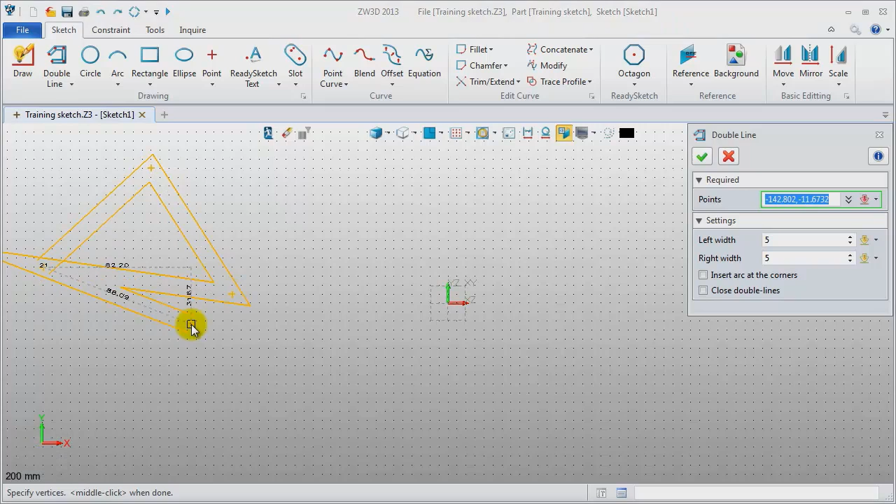Pick these points, and pick these settings options to create a closed geometry with arc. Change these values to finish. Okay, here it is. Let's try rectangle.

Pick 2 points, move your mouse. Done. Very easy.

Slot geometry. Define 2 center points and radius. Done. For point curve, just need to pick some points in any position.

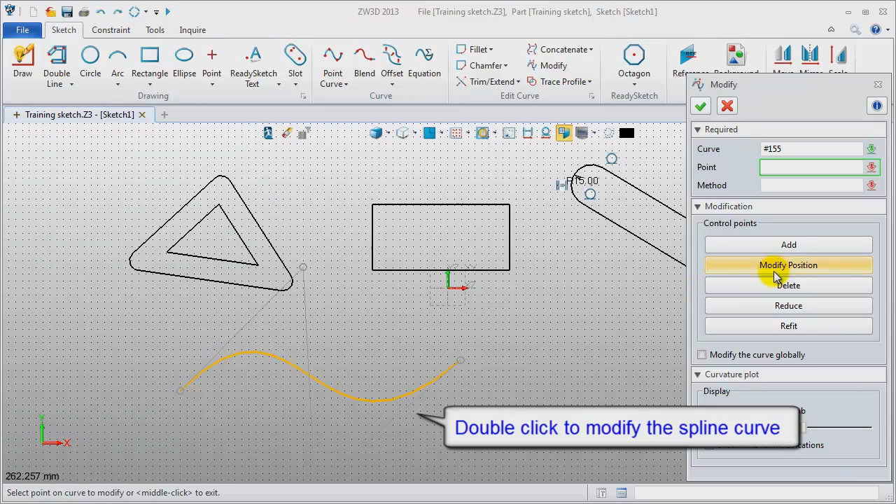Double click to modify it. For example, modify position. Select the control point to change it. Change the other one. During this process, pick this option to display curvature comb. Then curve information will be more intuitive.

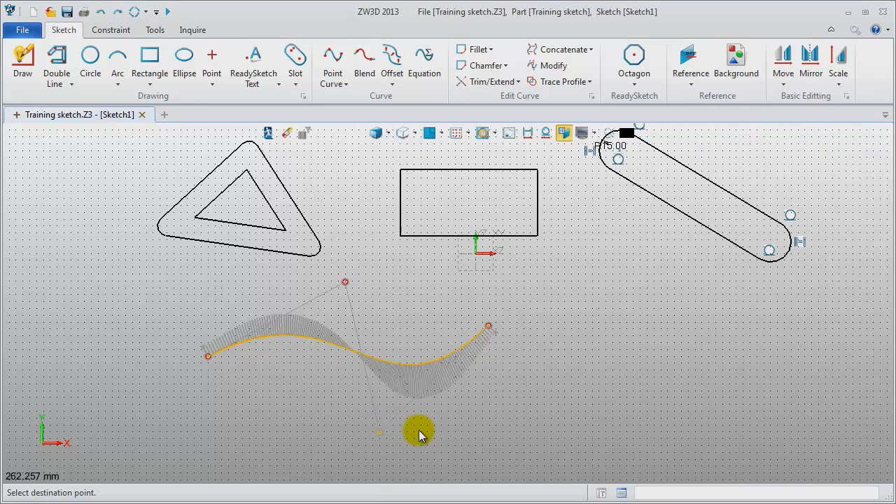Create an offset curve in both directions. Also, there is equation curve, providing several different types.

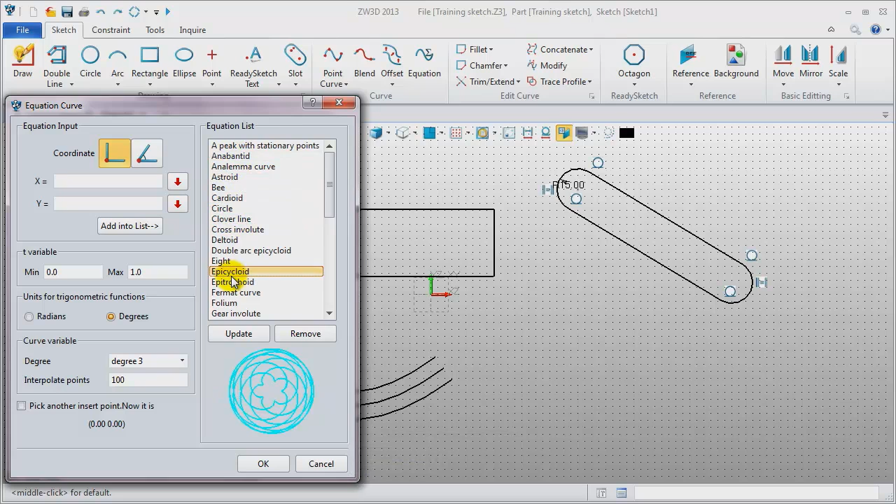Double-click to select it, and then define a new location. This is the helical curve. All of these operations are easy to learn.

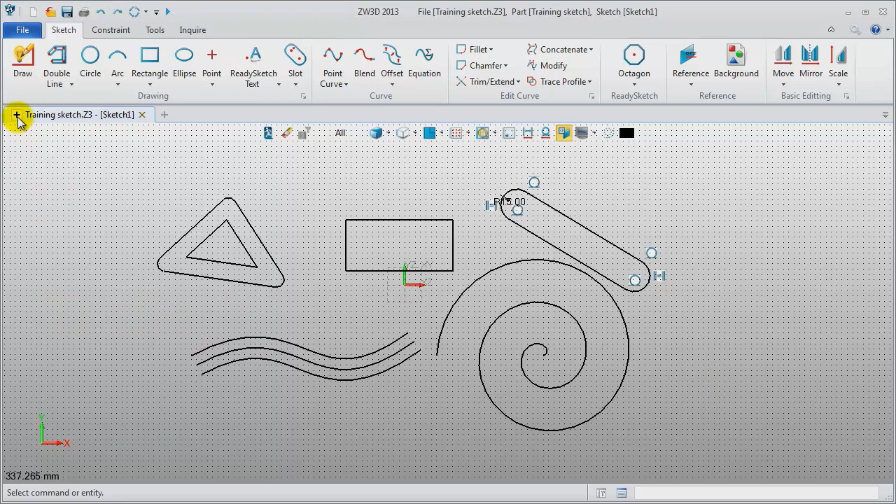The following section will introduce quick draw. Firstly, create a new file. Name it Quick Draw.

Okay, click Draw. Directly select points to draw lines. Here, you draw a triangle. There are other options for you.

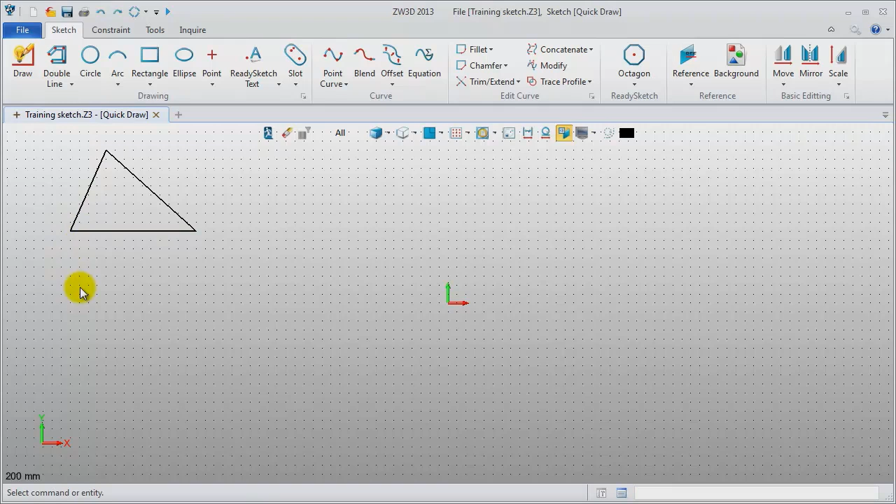The second type is tangent arcs. You draw a line first, left click to change the control condition, and then draw tangent arcs.

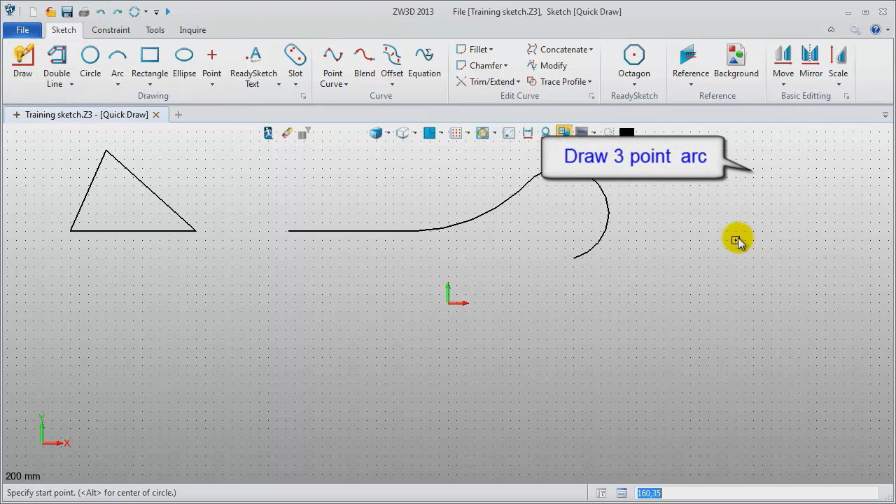The third type is 3-point arc. Pick the first point, press Alt button on your keyboard to define the second. Directly pick the third. The fourth type is circle.

Press Alt to define the center point and then select a boundary point.

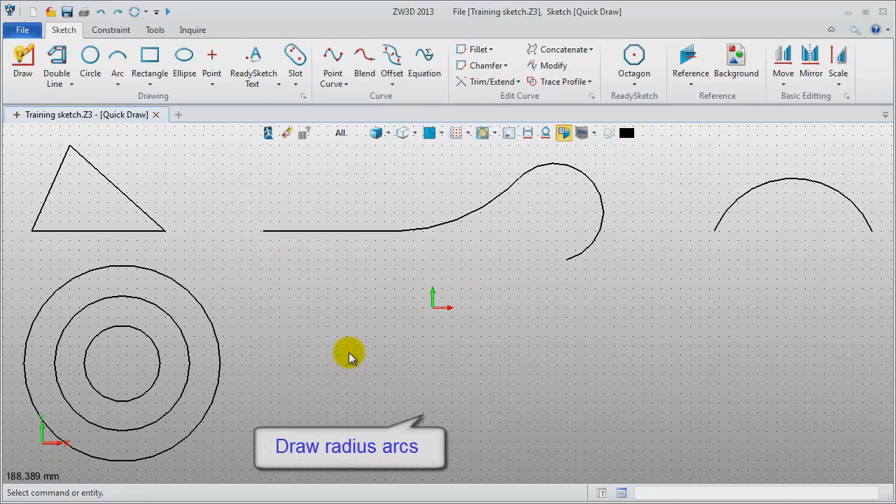The fifth type is radius arc. Pick the first point, press Alt for second point, and then input the radius. Then move your mouse to find the shape you want.

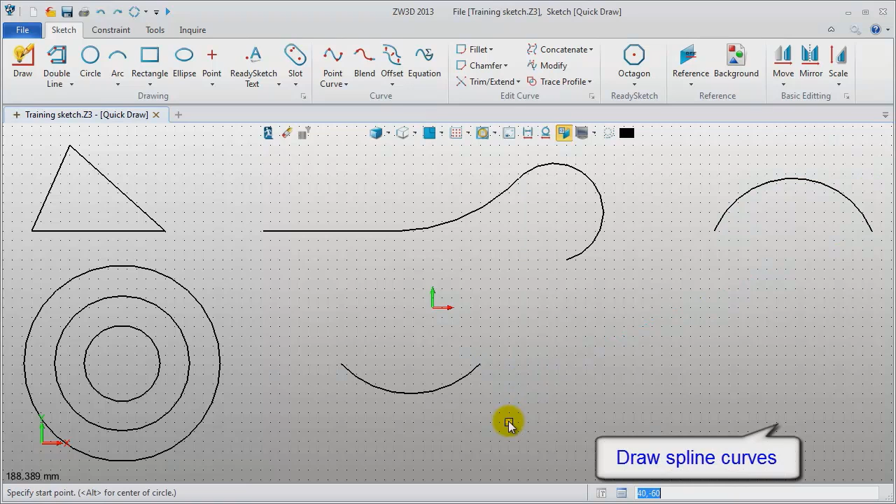The sixth type is spline curve. Select the first point and press Alt for second and third point, then directly pick other points. Also, you can double-click to edit it.

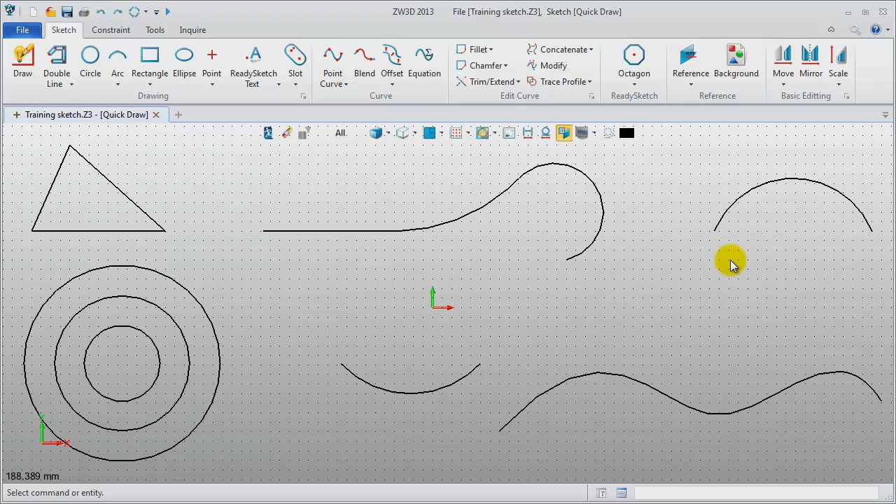Next, we will introduce the trace profile. Again, create a new file, name it trace profile. Insert sketch, choose XY plane.

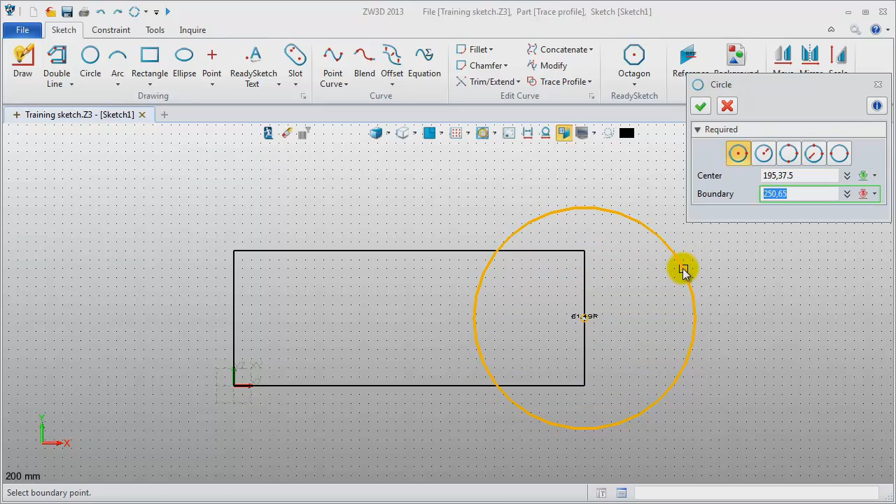Now draw a rectangle by 2 points. Add circle geometry. And then do it again on the other side.

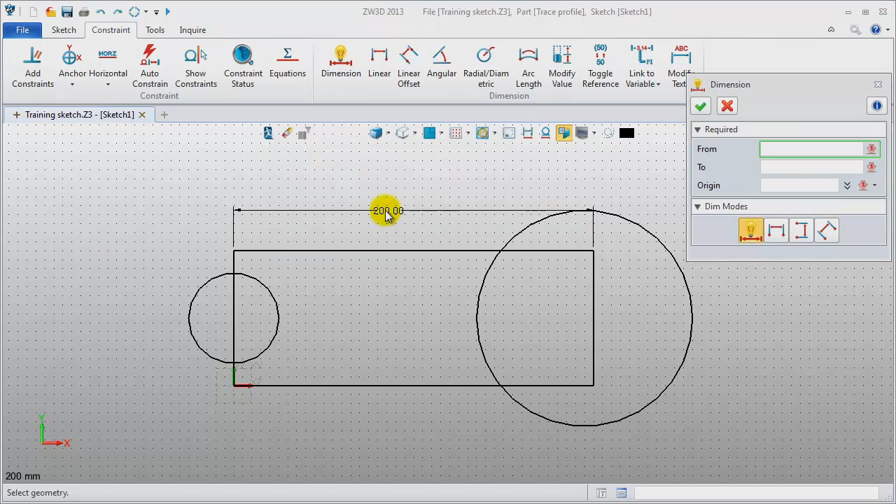Now add dimensions. The length is 200. The radius for the right circle is 60. Then add constraint. Locate center point on the line. Close the window.

Now create a trace profile. Select the position point. This blue profile is created to be trace profile. Exit sketch.

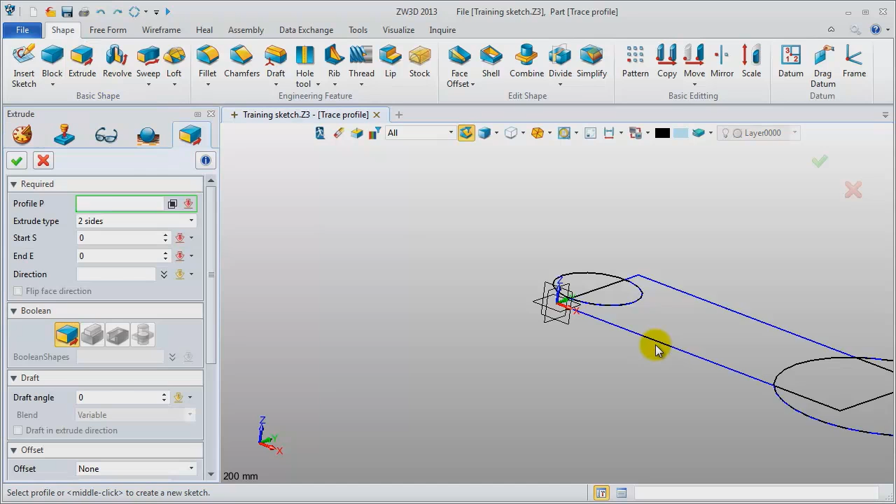Here, extrude this sketch to make a model. Define the extrude value.

Continue to add another sketch. Select the top face. Create a ReadySketch, for example, octagon. Define the base point.

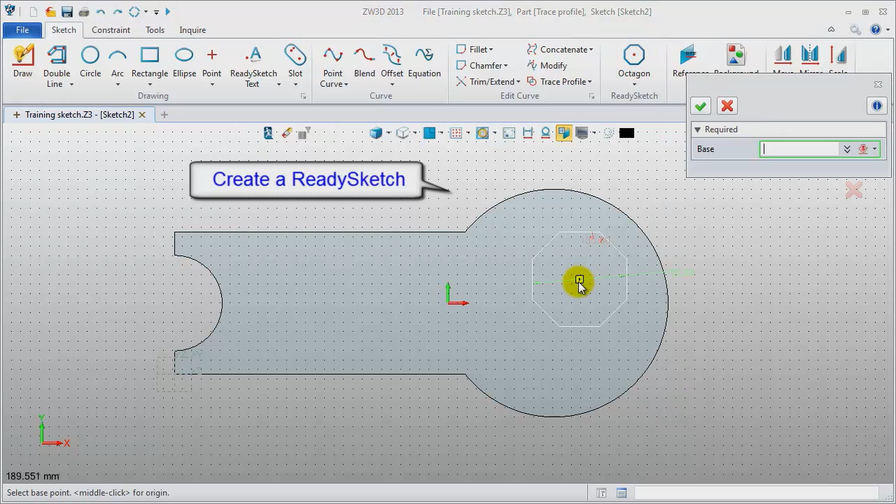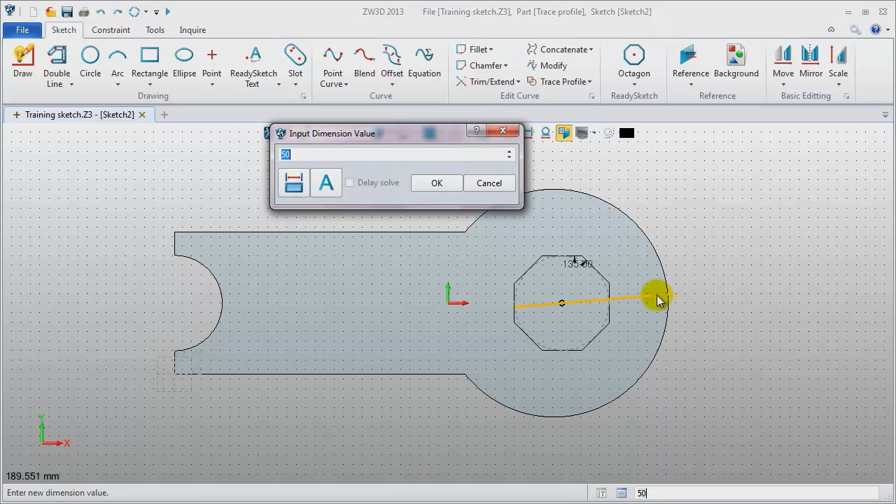Now edit it again. Close the window. Access, make an extrude cut operation. Change the values.

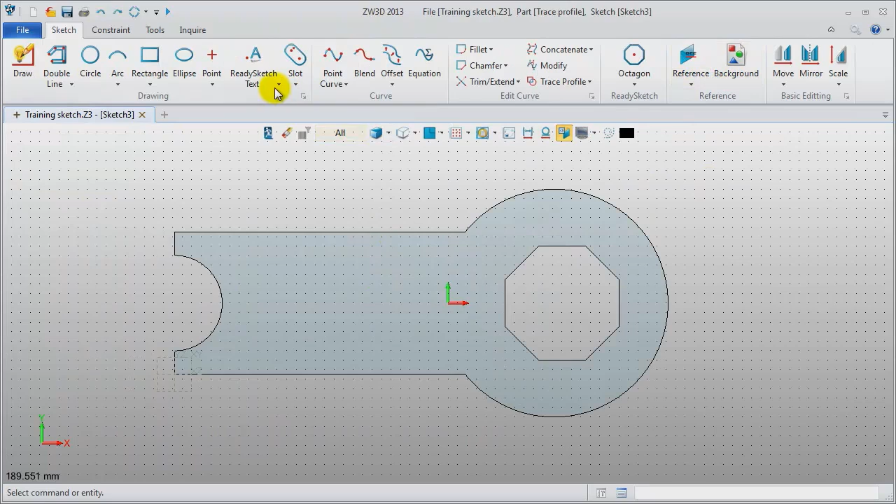OK, add new sketch again. Create a ready sketch text. Define an origin and input the text.

This kind of text is curve geometry, so we can just type ready sketch text. Then define the size. OK.

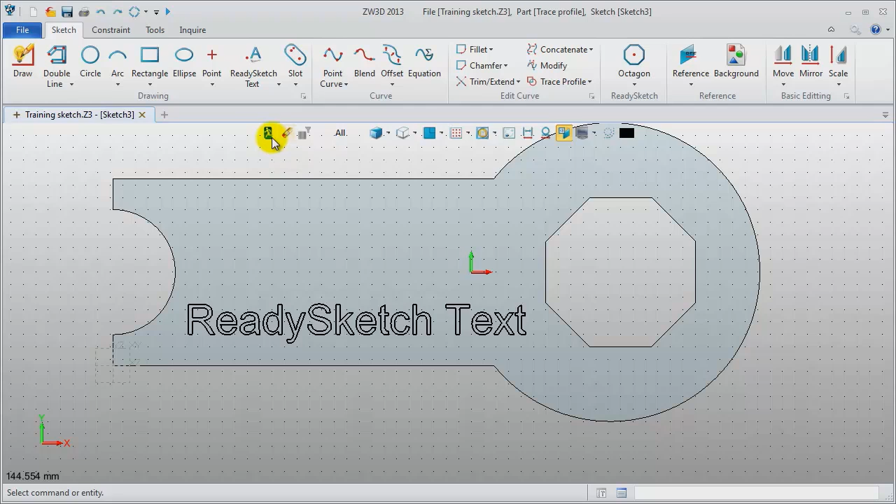Exit sketch, so this text sketch could be extruded. Define these parameters to get the solid model. Done.

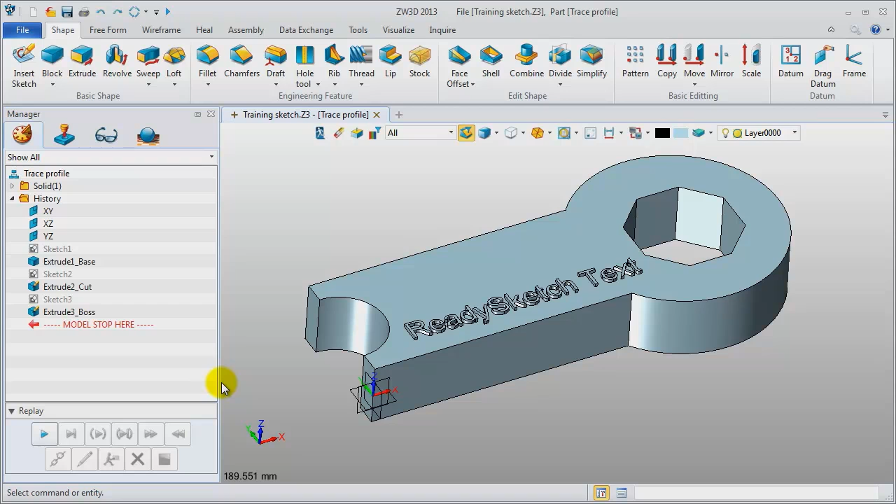For trace profile, what are the advantages? Let's see. Redefine the first sketch. Turn on the dimensions and modify them.

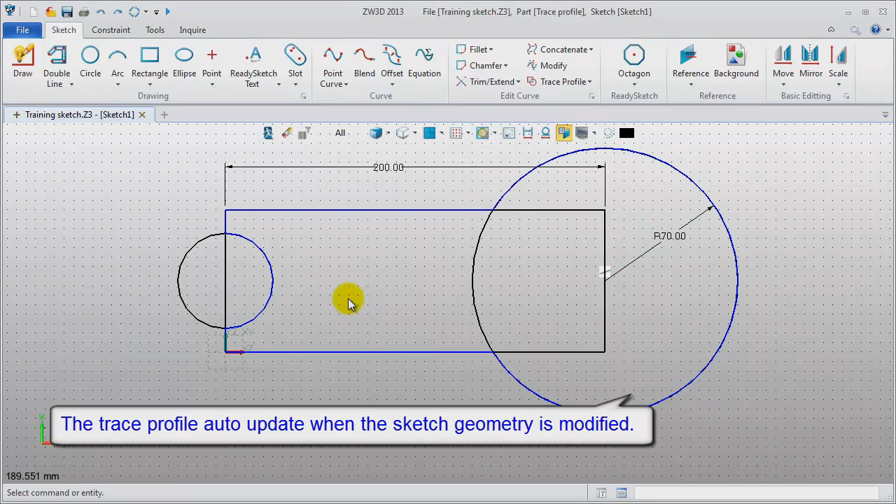The radius is 70. Set auto region. Do it again. Now the trace profile is auto region.

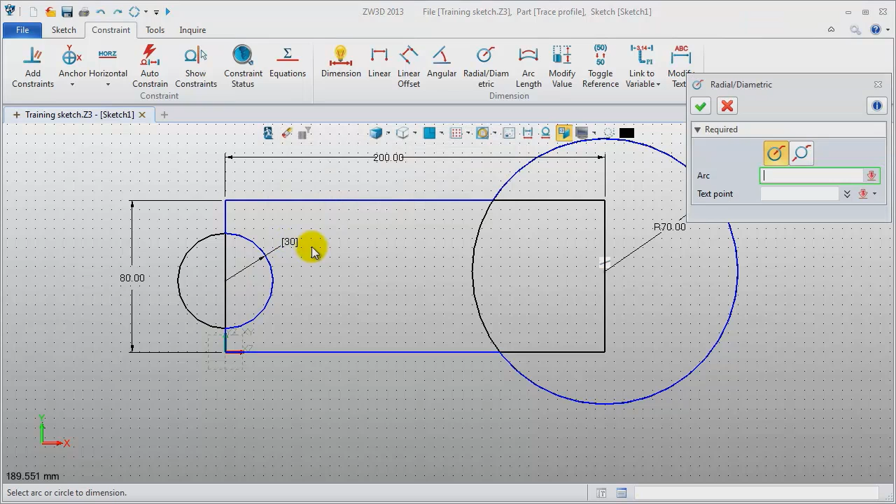Add the width dimension, set it as 80. The radius of the left circle is 30. Close the window, also set auto region. Do that again. Back to modeling environment.

So now you can see the model is updated.

Okay, the next part comes to dimension and constraint. We will introduce how to add constraint and dimension, toggle dimension, how to link dimension with variables, and solve conflicted constraints. I'll show you a case.

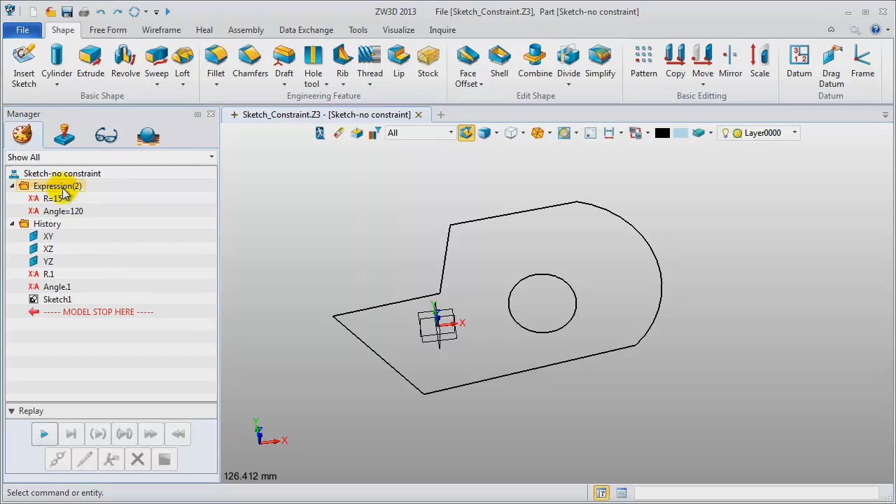In this file, there are two variables and an existing sketch. Edit this sketch. Firstly, check configuration. Pick these options. Okay, apply.

Click Add Constraints. Select this line and arc and choose Tangent Constraint. Horizontal Constraints. Make these two lines perpendicular, and same for these two.

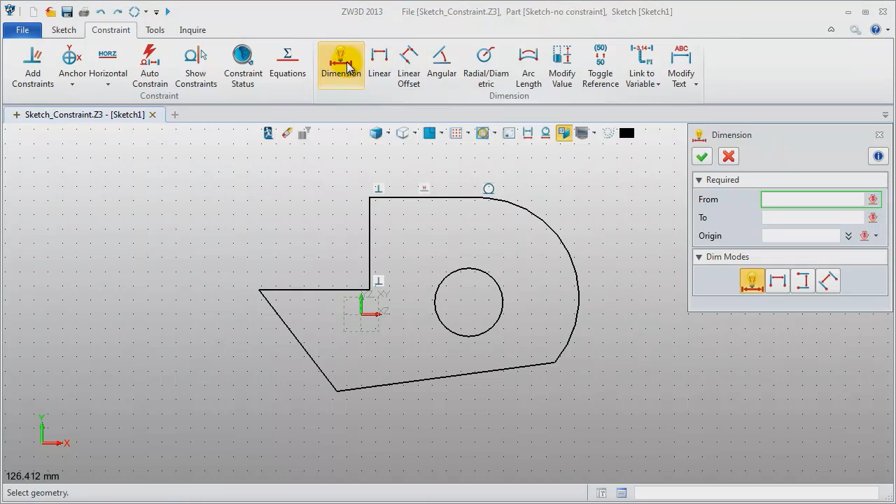Add dimension. The length of this line is 35. This one is 45. Add angular for these two lines.

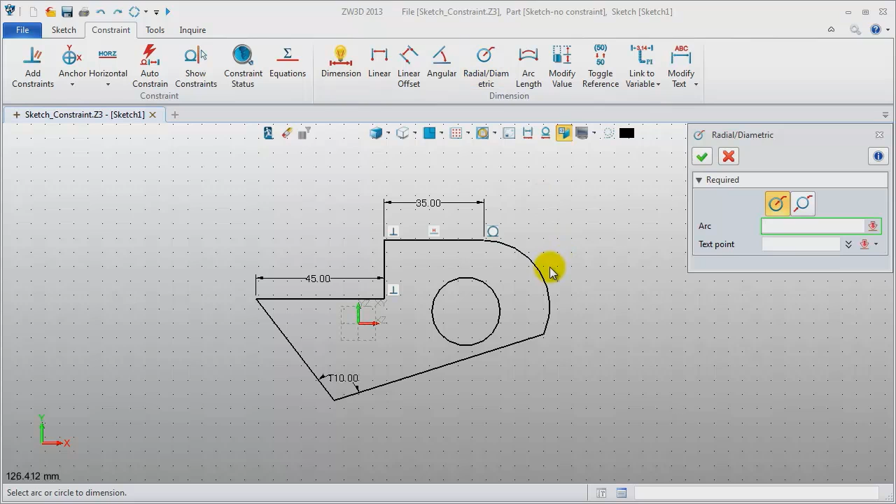Make it 110 degrees. Add radius for this arc, define it as 35. This circle's radius is 12.

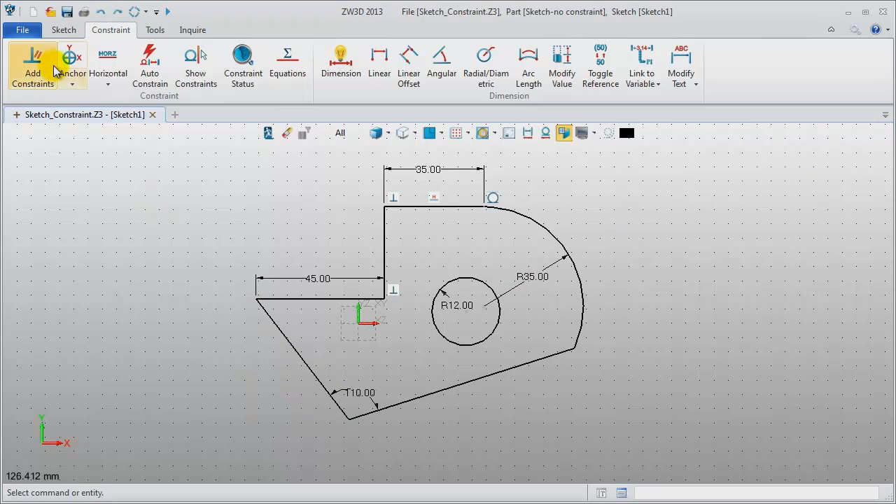Continue to add more constraints. These two lines have the same length, and so does these ones.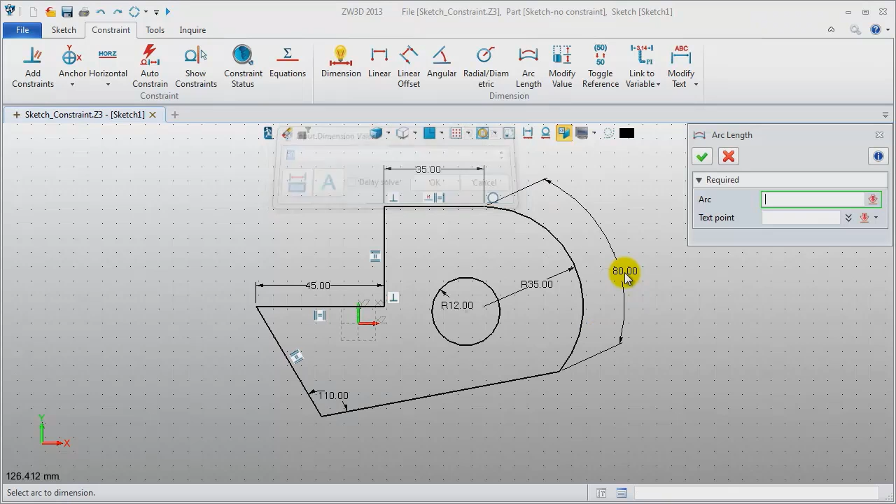Add arc length for this arc. Make it 80. And define this line and this arc as tangent constraint.

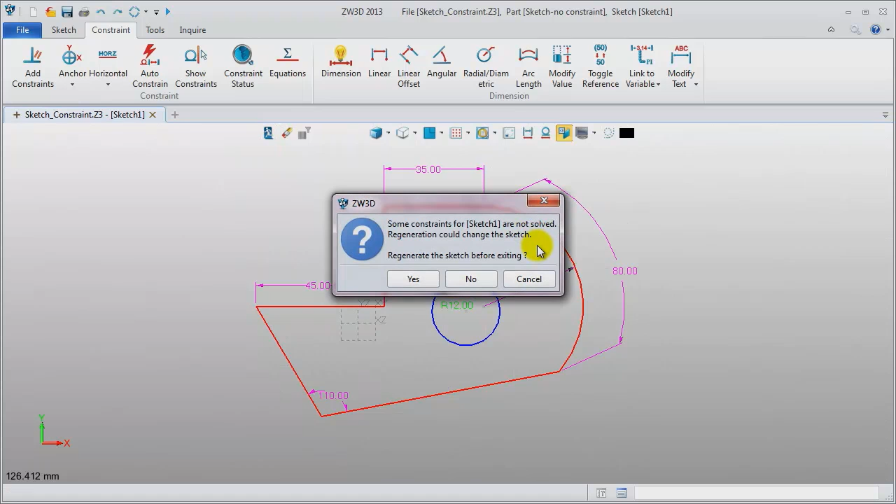Oh, the sketch is displayed in red color. If you exit sketch, a message will pop up. What's going on? Just click No first. I'll tell you the answer later.

In the History Manager, the sketch is marked in red color. It means that this sketch has conflicted constraint. Now let's see how to solve this problem.

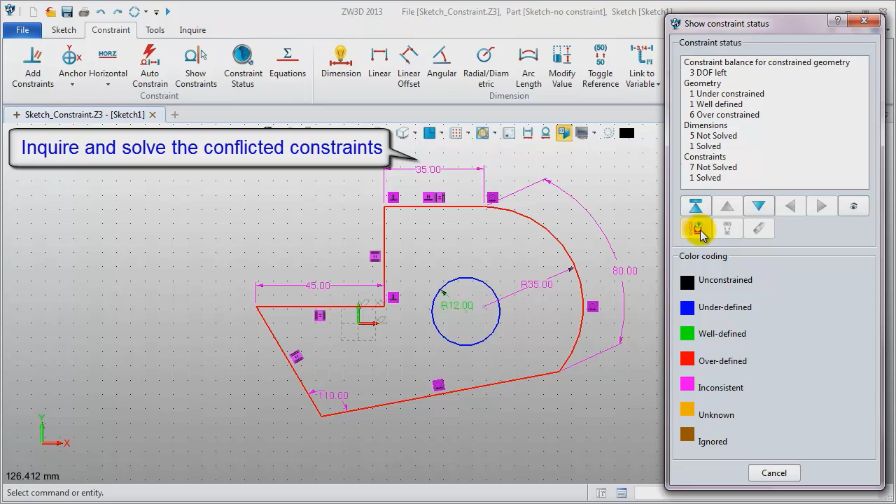Redefine it. Inquire constraint status. Red color means overdefined. Click this button to get unsolved constraints and dimensions information: tangent constraint, equal constraint, arc length. For any dimension, we can toggle it or erase it.

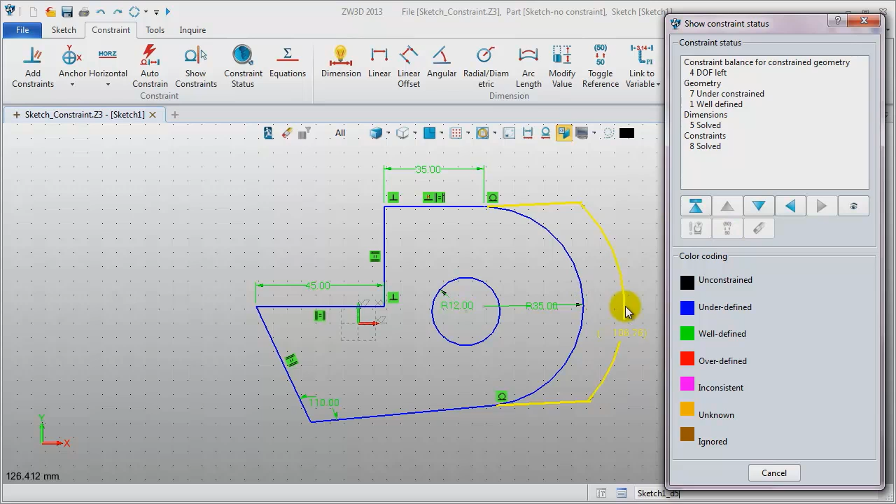Now, toggle arc length. At this time, the sketch is good, and the tangent constraint does work. Let's continue to define this sketch.

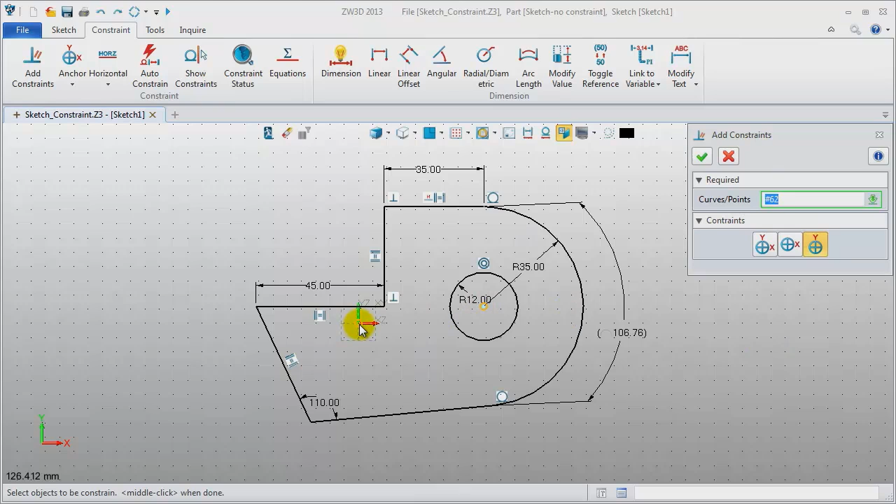Add concentric for this arc and circle. Define these 2 points with the same Y position. Add horizontal distance for them. Make it 40.

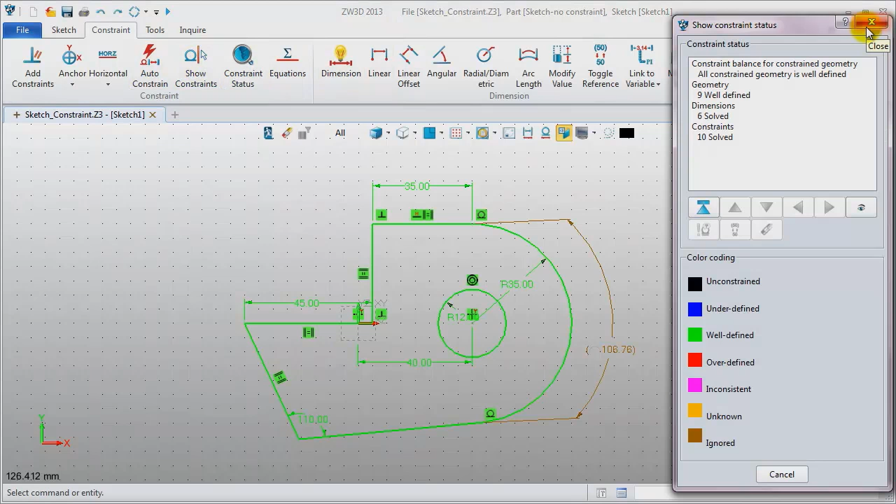Check the sketch again. See? It is well defined now. Exit sketch. It is okay in the History Manager.

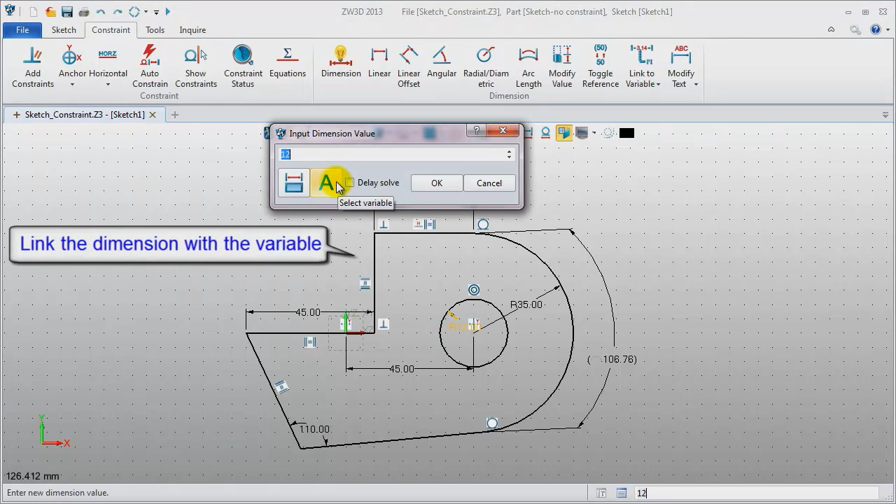For these variables, how to define the link relations? Let's check it out. Redefine the sketch. Double-click this radius dimension. Click this button to select variables.

In this dialog, select the right file and the needed variable. Click OK. The radius value is updated. It is 15.

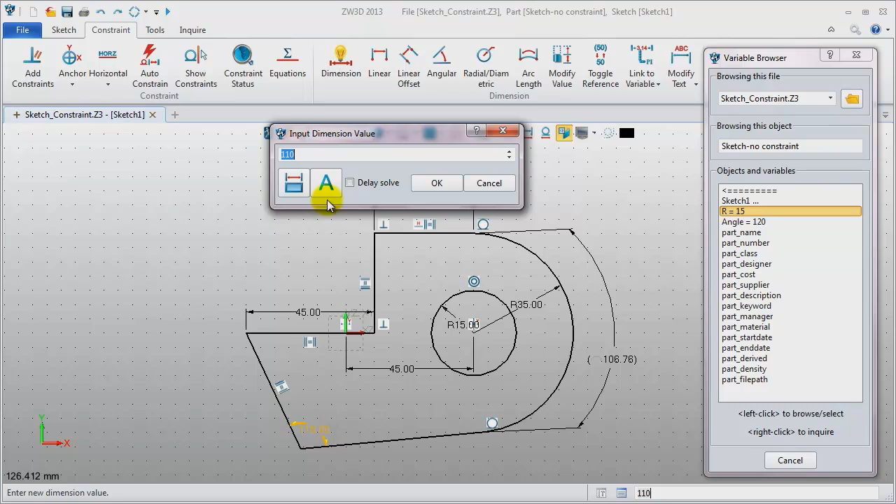Pick this angular dimension. Do the same operation. Select the angle variable to finish. Then this geometry is updated. Return to modeling environment.

When editing the value of variable, make the value of radius 20. Then the sketch is automatically updated.

Modify the angle value, make it 125. Also, the sketch will be automatically updated.

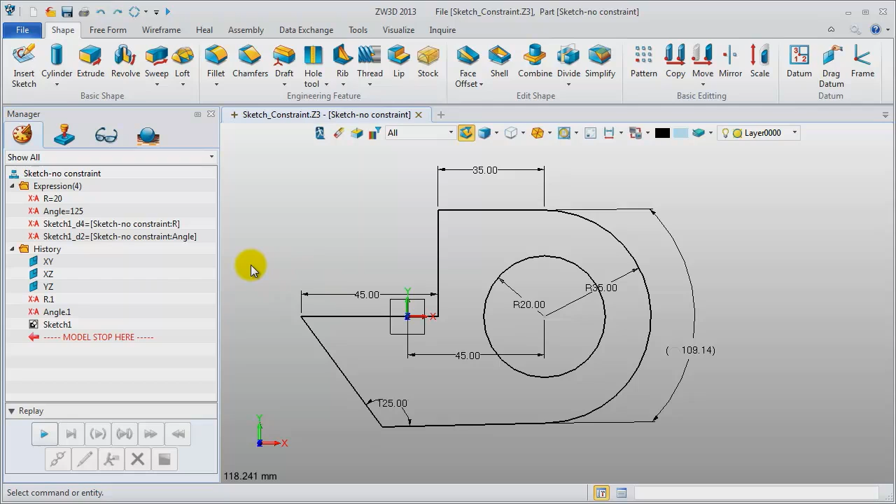Next, let's see some sketch skills. First, use curve connectivity command to check the sketch is closed or open. Second, use copy and paste to reuse sketch. Third, relocate the sketch with a command on the right menu.

Now, let's make a new file. Name it sketch skill. Create a basic geometry like block.

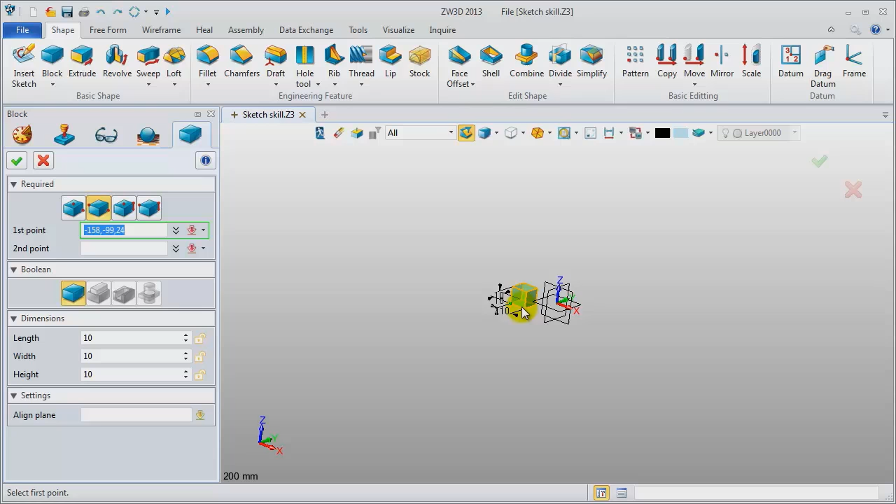Set the length as 800. The width is 400. Insert a sketch.

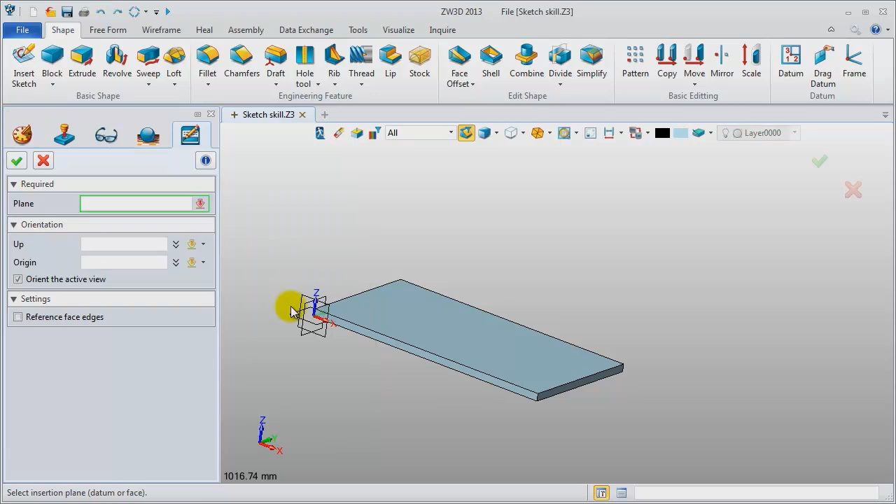Pick the XY datum. In this sketch, we can directly import an image and get some curve information.

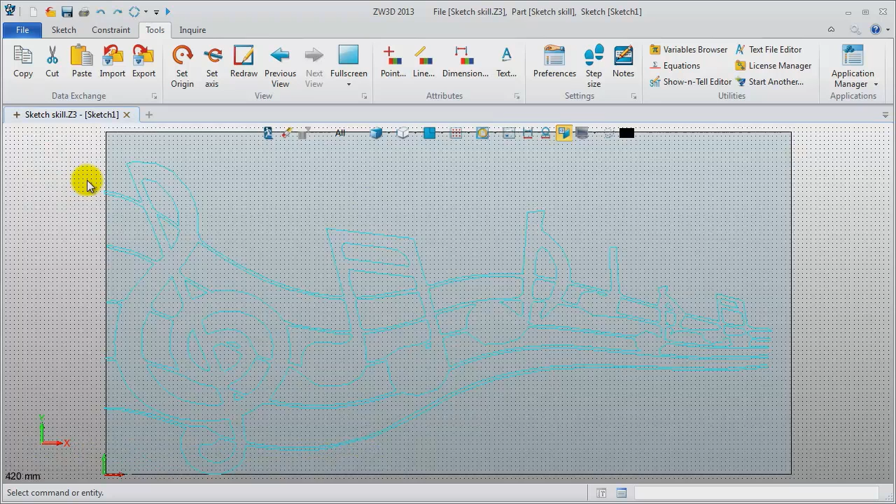To see it clearly, let's change the curve attribute. Make it black color. Okay, exit sketch.

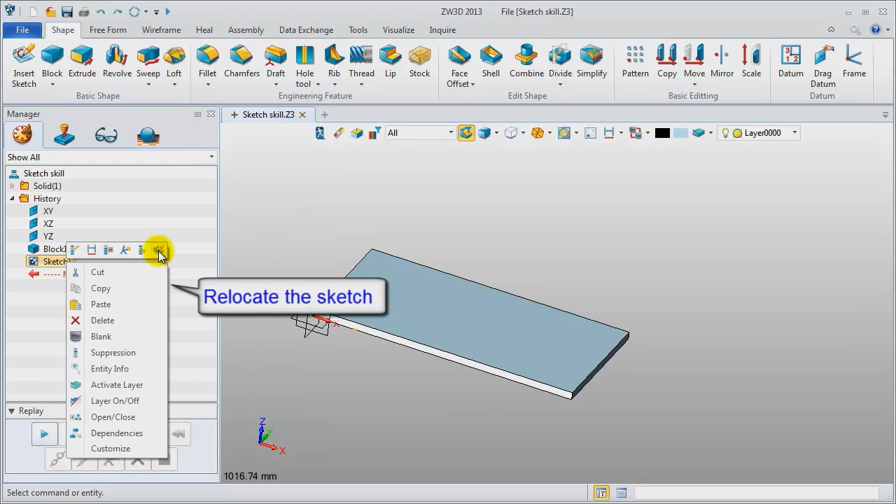You can see the sketch is located on the bottom surface. Now, from the right menu, we can relocate it. Define the new plane, up direction, and original point.

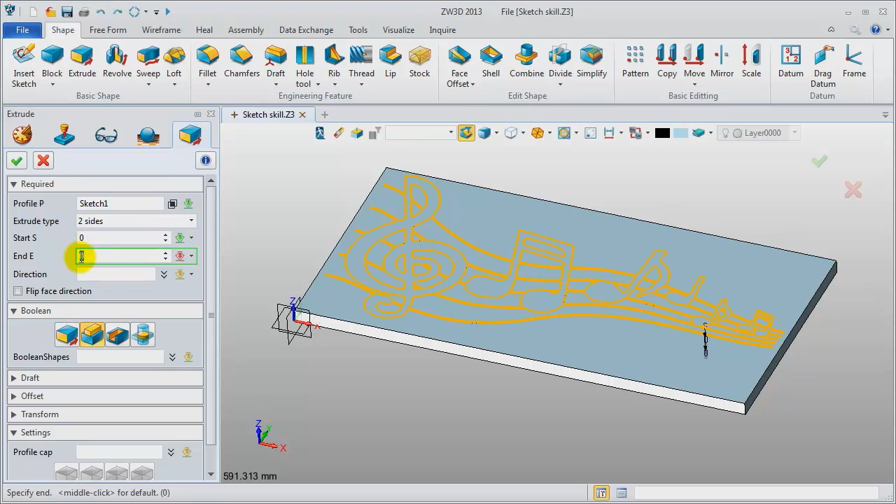Next, do extrude operation. Extrude this sketch from 0 to 2 mm. When you scroll down, you can see on the command panel these settings are inactive. It means that this sketch is not closed geometry.

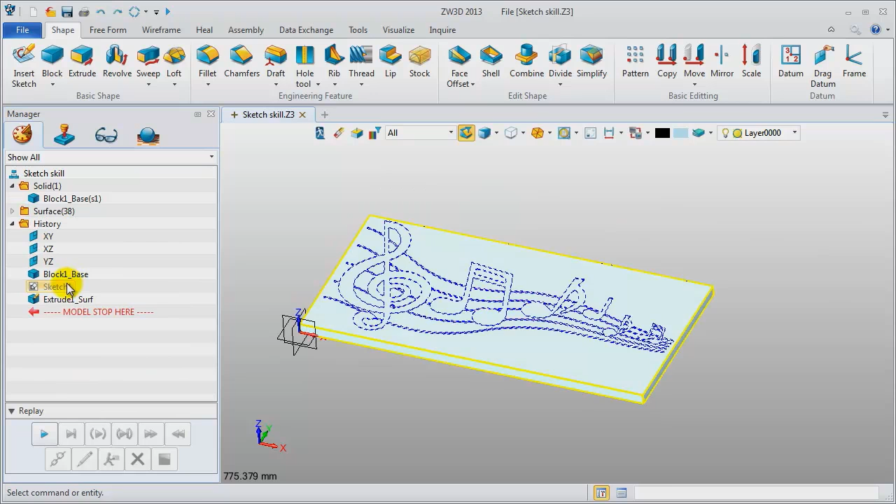Let's check the result. In History Manager, there are so many surfaces information, not solid geometry. Redefine the sketch to check what the problem is.

Show target to see clearly. Choose Inquire and click Curve Connectivity. The check result is shown in the output window. 2 unmatched, 0 overmatched, and they are marked in the sketch.

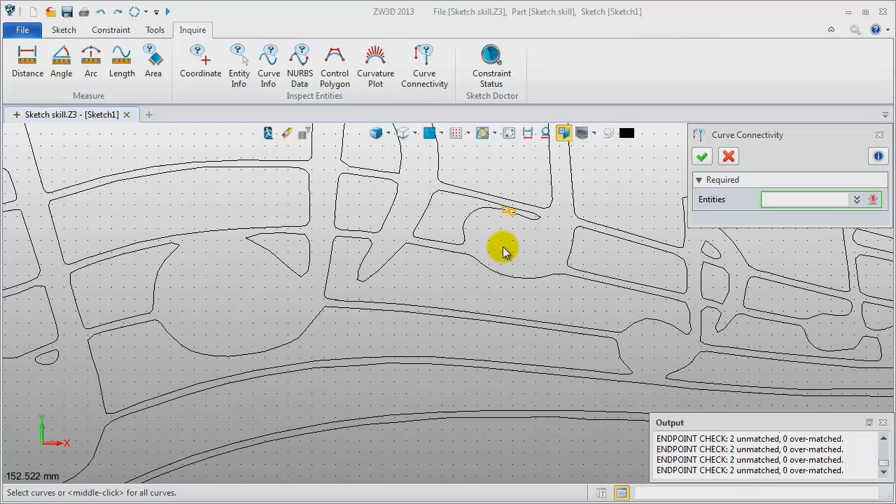These two endpoints are not connected. Use blend command to create a connecting curve.

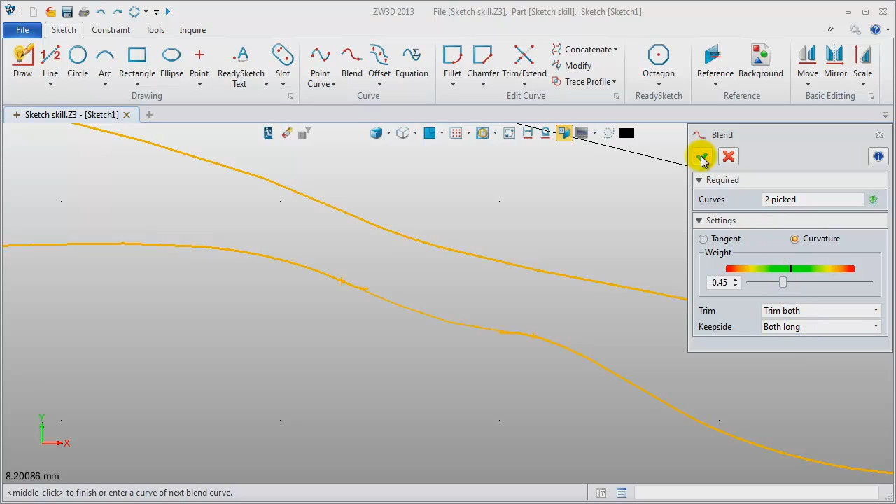Select these curves and use default settings. Trim both long, then click OK. This is blend curve.

Now we can check it again. 0 unmatched and 0 overmatched. This is the closed geometry, and this model is updated. It has become a solid part.

How to use the sketch? Firstly, enter the sketch environment. Press Ctrl and C to copy it. Define the base point.

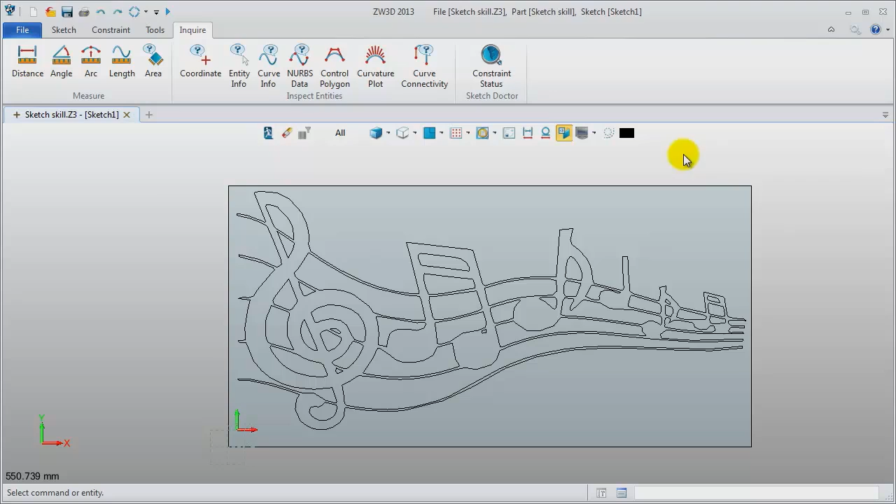Create a new file. Name it Reuse Sketch. Insert a sketch. Use Ctrl and V to paste it. This operation is very easy to do, even between different files.

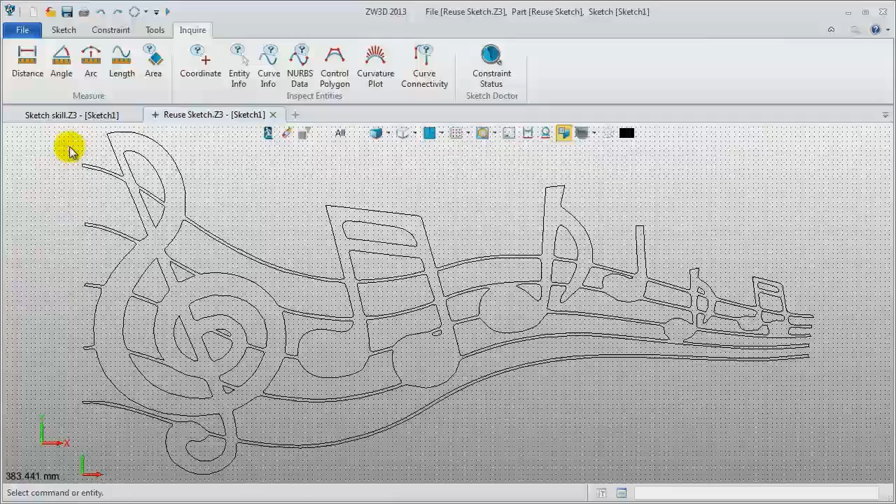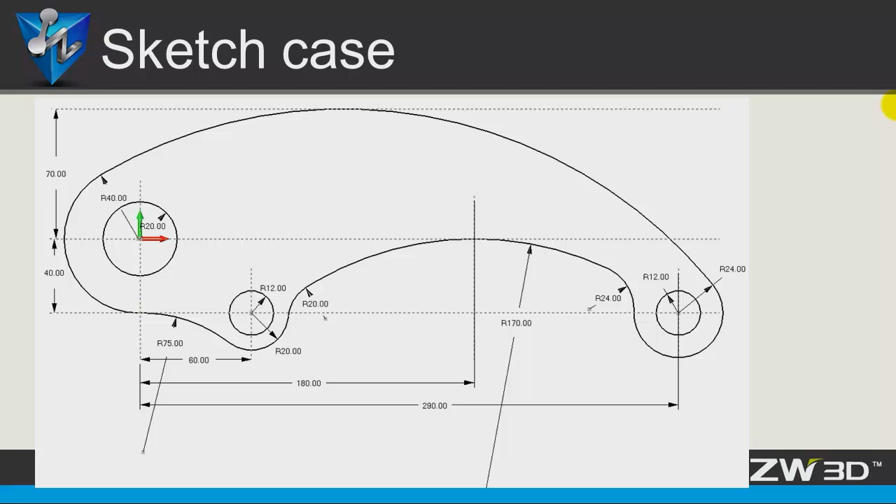In the end, let's do an exercise to get familiar with sketch feature. Create a new sketch file. Step 1: use line command to create some needed reference lines.

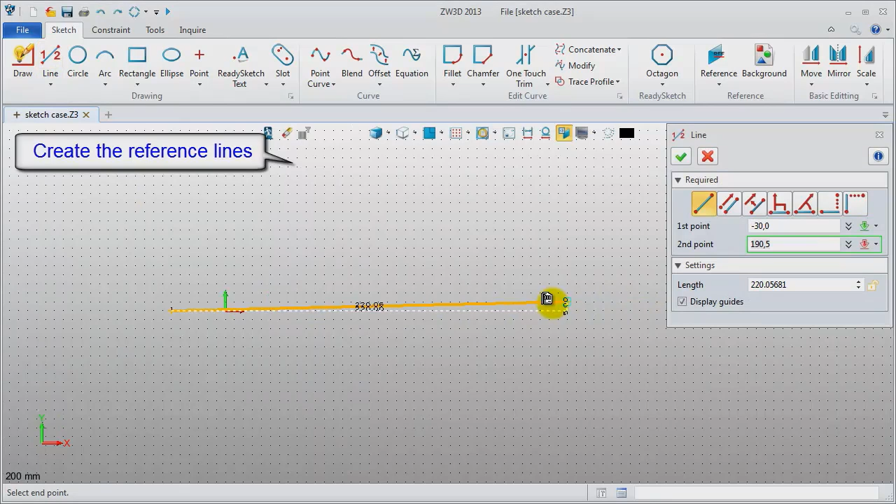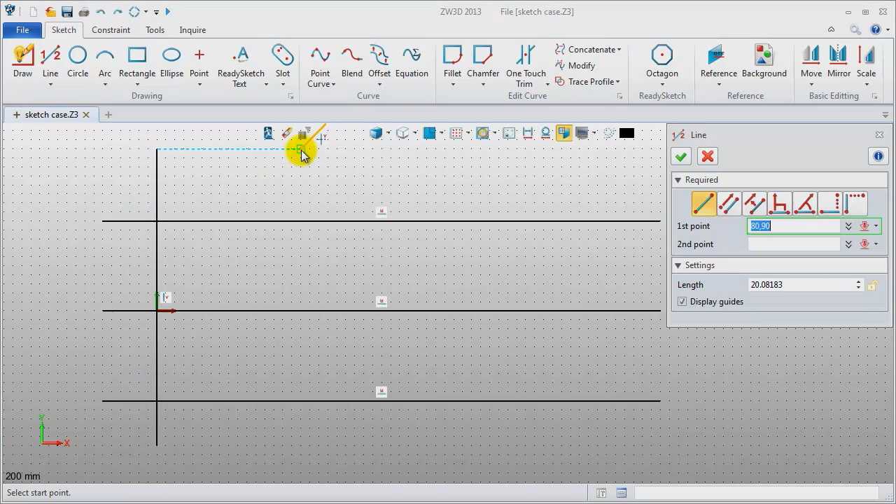First, horizontal line. Then the second one. And the third one. These are vertical lines. First, second, third, and fourth. In the first step, we don't need to care about the detail distance.

Next, add some constraints. Locate this line in the Y direction and this one in the X direction. Add the dimension for others.

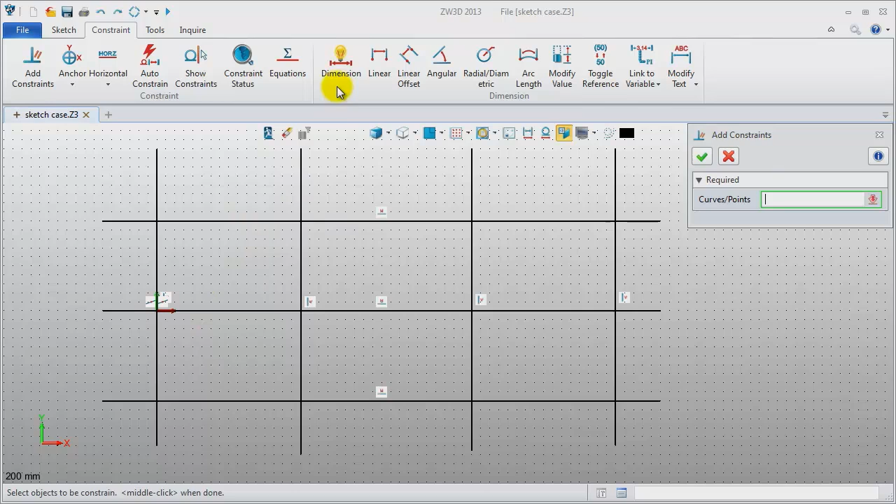Let's say 70 for this. This one, let's say 40. Then this one, 60.

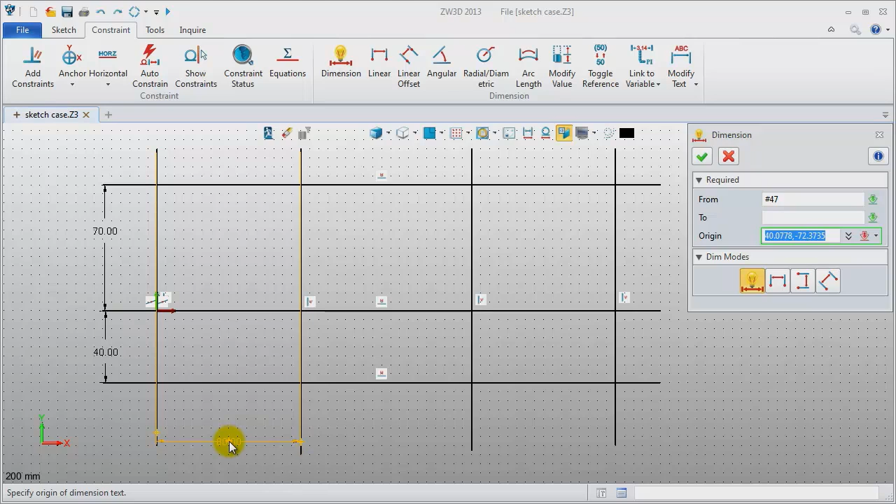Next, make it 180. This we set it as 290.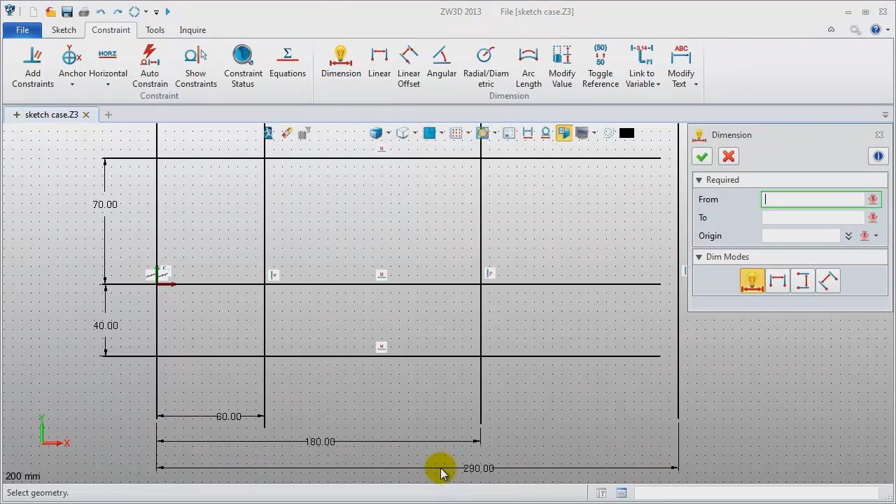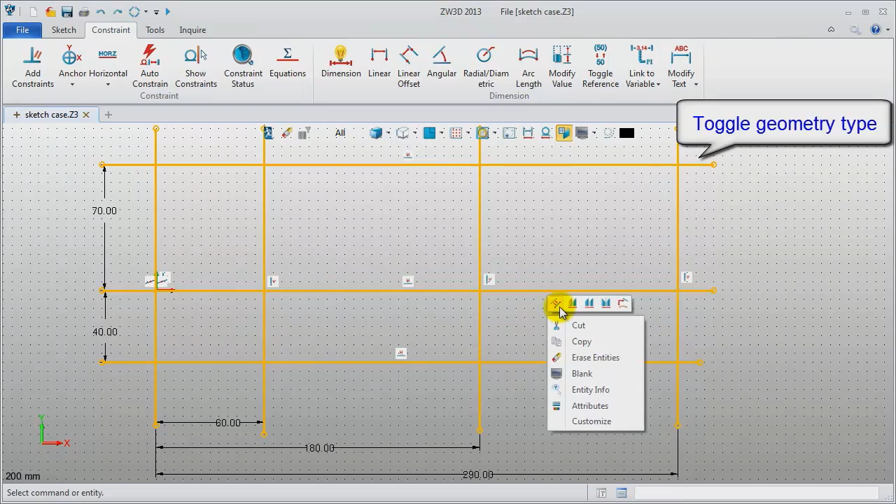Then we use drag and drop to directly extend these horizontal lines. Last operation, select them all, right click, choose toggle type. Then they have become reference lines.

Step 2: Create some basic geometry. Draw circle and type in the position of center and the radius value. This one is located at original point and the radius is 20.

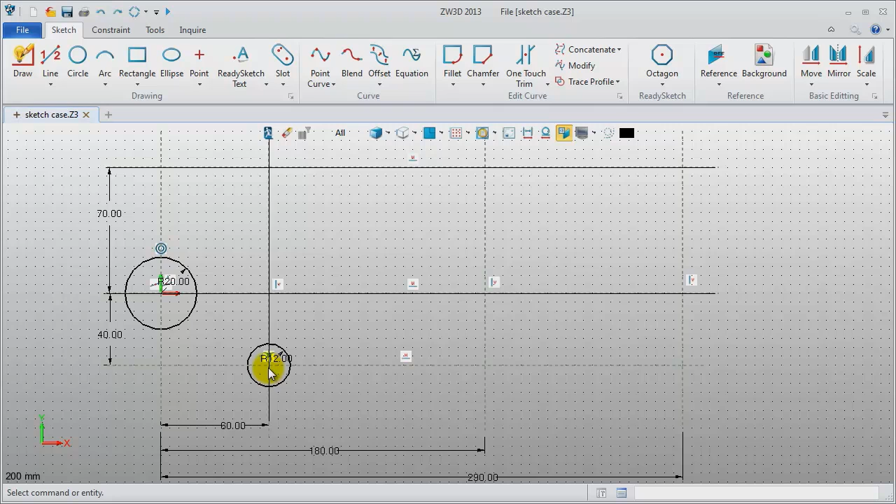A new position, radius is 12. Second one is 24. Do it again, radius is 12 and 24.

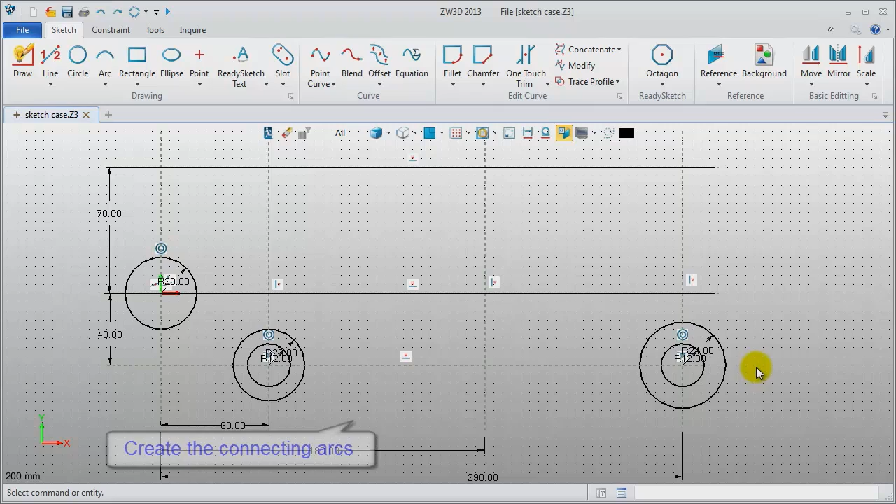Next, create the connecting arcs. First, use the angle method. Center is the original point. Radius is 40. Pick points to define the start angle and end angle.

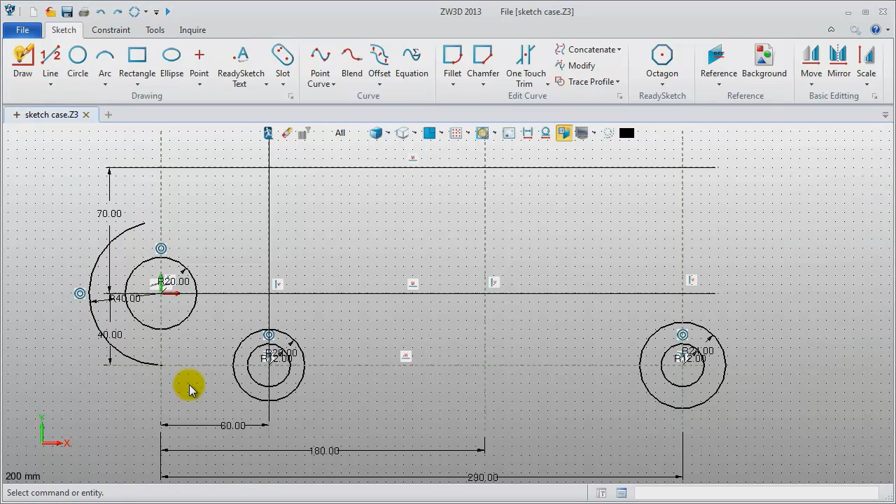Continue to draw others. Use 3-point method. First point, second point, and through point. Do this again with the same method.

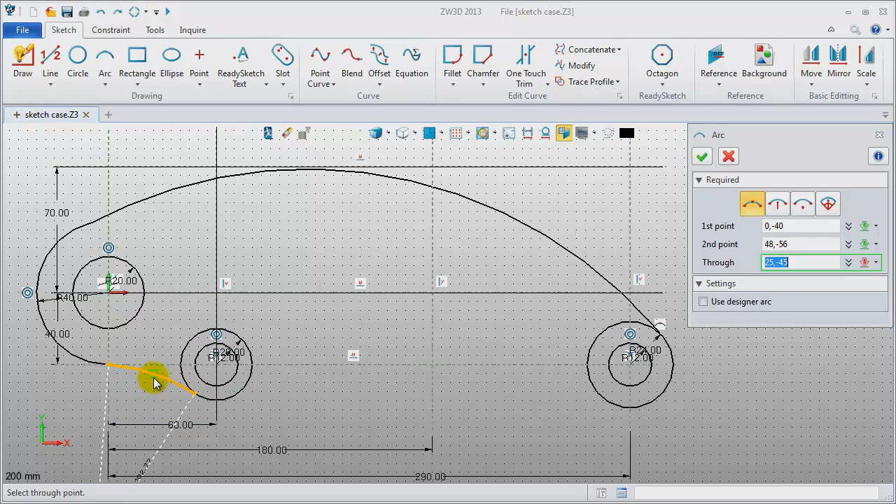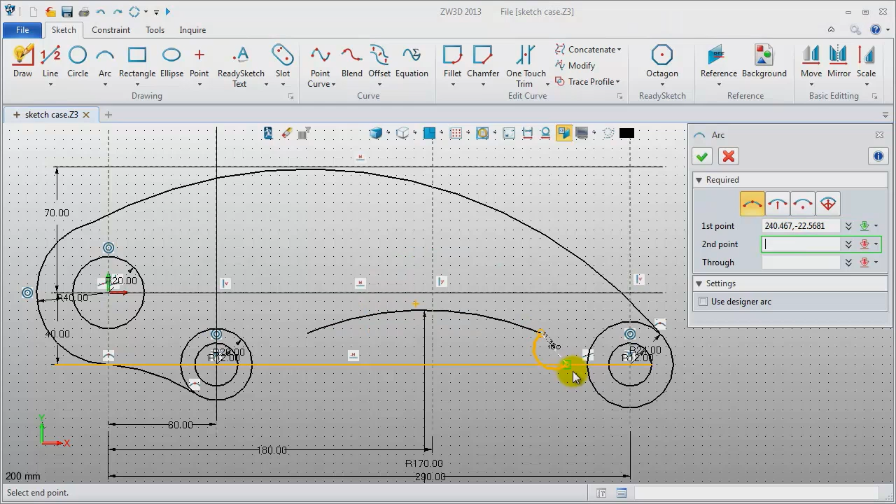And then, this arc uses radius method. Pick 2 points in this area and set radius as 170. Other 2 arcs also use 3-point method. Select the suitable positions.

After finished drawing, next step is to trim the geometry. Trim these unneeded arcs.

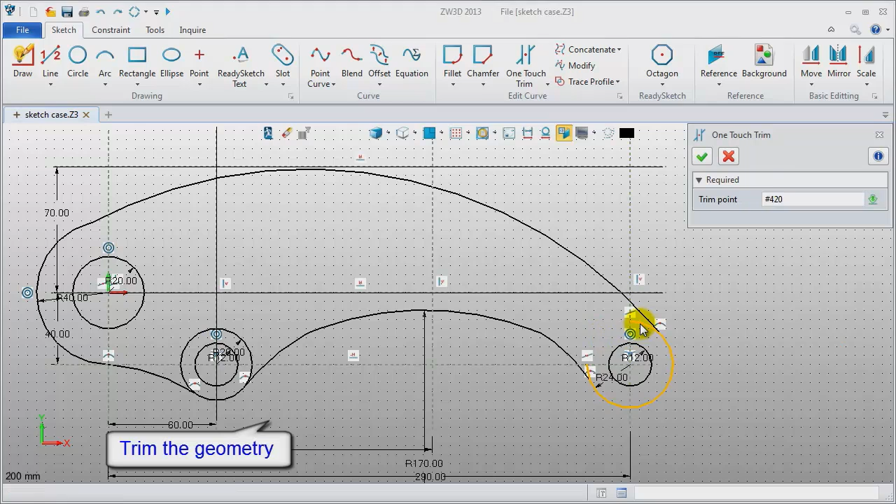Now step 5: add the constraints and dimensions. All of the arcs should be tangents. 2 bigger arcs are tangent to the horizontal reference lines. Define them one by one.

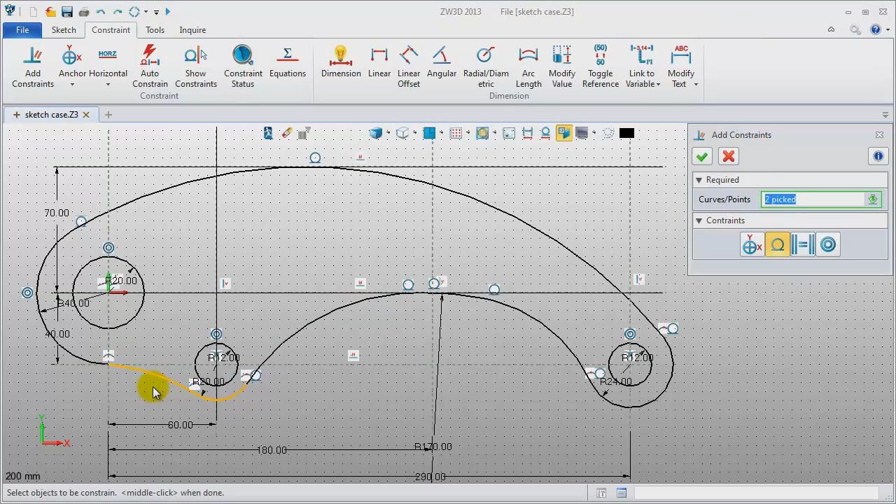Just pick the arcs and add tangent constraint. Go on. Here is the last one.

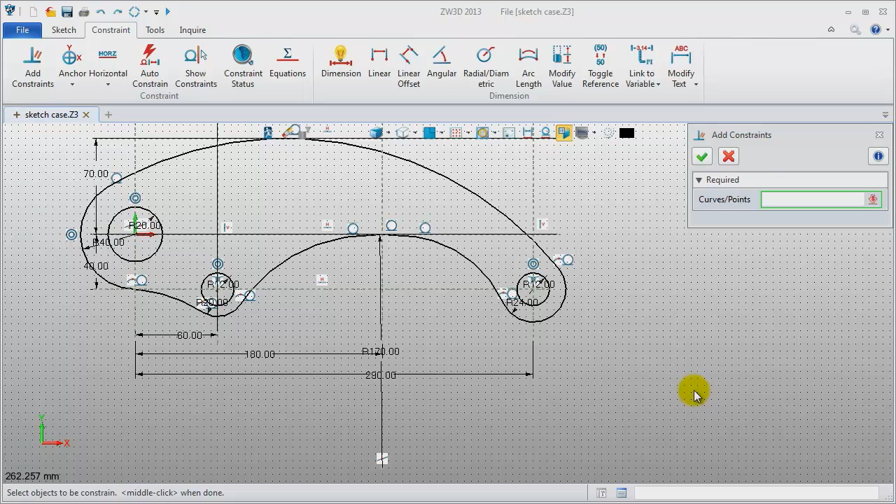Step 6: Continue to add some other constraints. The center of this circle is located on the third vertical line. Add some dimensions.

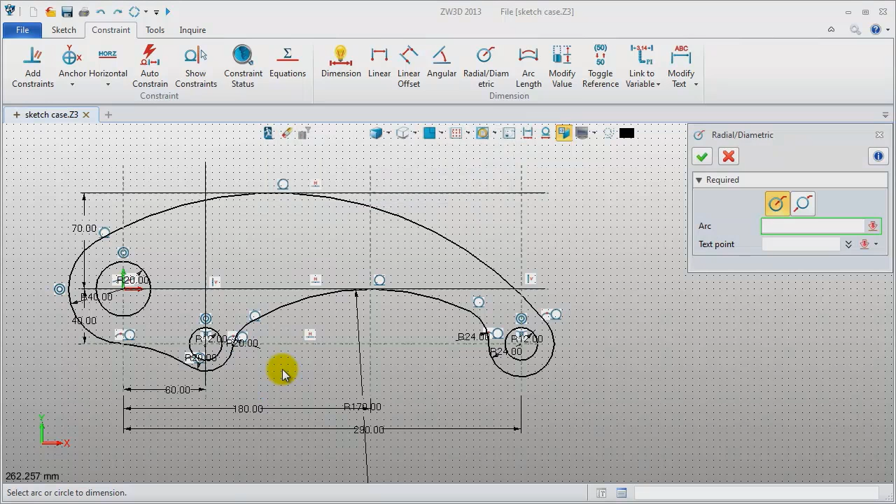This arc's radius is 24. And that one is 20. The last one is 75.

Okay, now let's inquire the status. As it is in green color, it means this sketch is well defined. So we can close the window and see this is the final result. Thank you for your time.